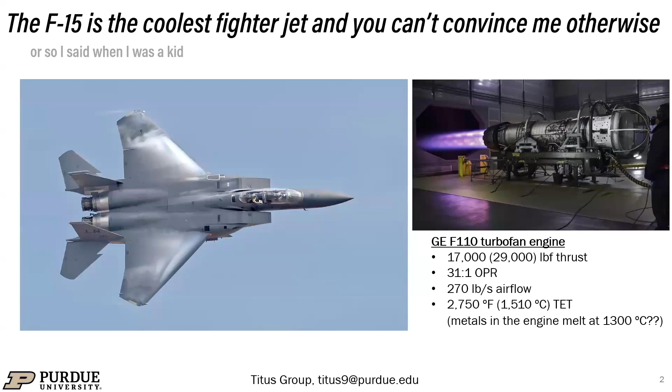And the crazy thing to me is that the hot combustion gas operates at 1,500 degrees Celsius, but the metals that extract the energy from that melt at 1,300 C. How does that even work? So we'll talk about that here in a minute. So things like that started to get me really interested in metals and fighter jets and aviation, etc.

And during my time there earning my BS, I took two internships at GE Aviation, now GE Aerospace, thanks in part to my family friend Walt Buttrell, who got my resume to the right person. Always use your personal connections whenever you can, because finding a space for an engineering physics major at GE Aviation is pretty tough. So that was kind of the through line there.

So being at GE Aviation got me really interested in the high temperature metals that are used in these gas turbine engines. And so I wanted to pursue my PhD in materials. And my advisor was Tresa Pollock then. So I went into my PhD actually, even before that, thinking I would just go work for GE, be 25 with a house and family, and the stock market crashed, so that didn't happen.

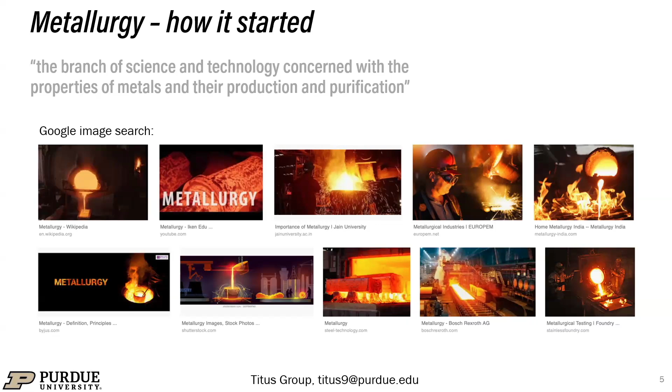So I work on metals, and one thing I really like to get across to students is that if you do a Google image search, this is what you see, kind of really red hot metals pouring and kind of dirty, the soot on that guy's face. And if you're interested in metals, this is a career that you can pursue, and many of our students do pursue this. But nowadays, it looks very different.

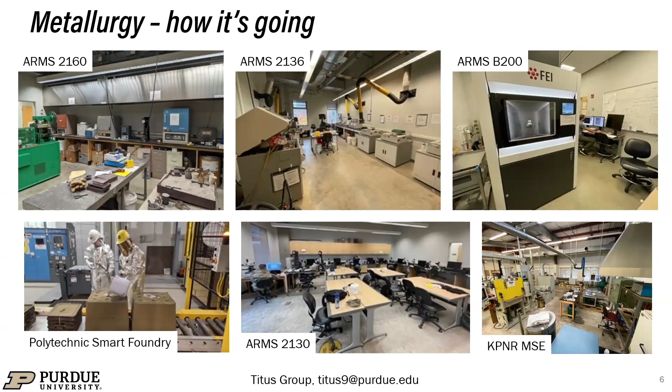So here's some of the laboratories that we're working in. I point out in the top right, this is a transmission electron microscope where we thin down metals to 100 nanometers, sometimes even 20 nanometers, right? And so it's only a few atoms thick, essentially. And then we just stick it in this microscope and crank up the magnification to see atoms, and I'll show you some of that later. So it's very different metallurgy now than perhaps what you may have considered in the past.

And metals are everywhere, right? So I remember when the Ford F-150 changed from a steel chassis to aluminum, GM came out with a commercial making fun of them for their weak aluminum alloy. And then 2 years later, GM started moving all their trucks to aluminum as well. So that saved a ton of weight for Ford and now GM.

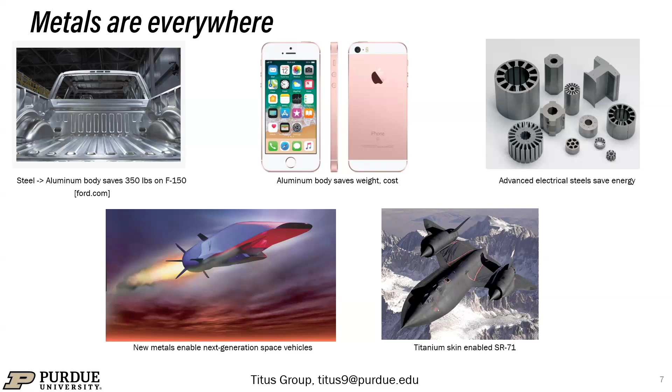Aluminum at the time was used on the iPhone 5S, I believe, and now Apple spent a bunch of time trying to figure out how to make it out of titanium, which is a really interesting metal story in its own regard. Advanced electrical steels, and then, of course, at Purdue, we're interested in hypersonic vehicles, and metals are used there. And the titanium skin enabled the SR-71, the Blackbird, which is my second favorite plane.

And so to kind of summarize this plane, what's really interesting is that the skin on this plane got so hot during flight operations, they needed a new alloy to cover it with. So they co-designed a titanium alloy during the development of this plane.

And honestly, a lot of that co-design for a given application has kind of been lost because we've come up with this whole catalog of materials that designers can go pick and choose. And then they say, okay, that one will work, and I'll design around the deficiencies in the material properties. But nowadays, I think we can come back to this concept of making new materials specifically for an application and making that co-design process very successful as it was for the SR-71.

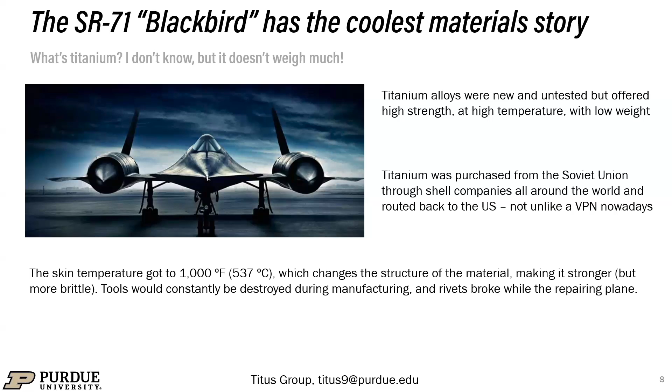Well, very successful. They did have problems. It heated up so much that the titanium alloy aged and embrittled. And so when they were doing repair operations, they would often break off many of these rivets, and a lot of the tooling would just get completely destroyed. So they didn't know everything about titanium at that point, but it flew. So good enough, I guess.

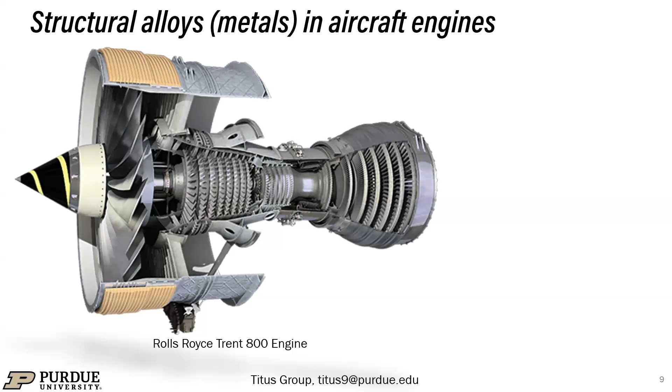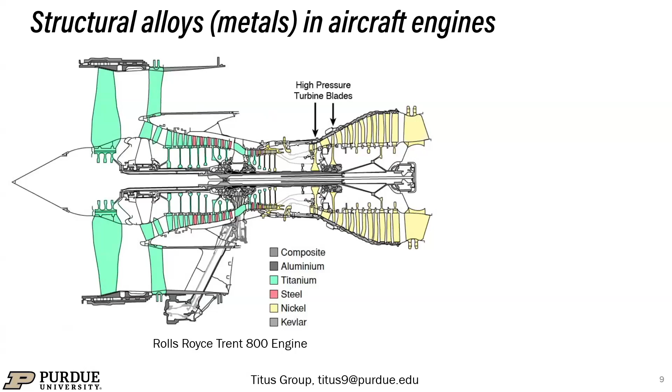So my research works a lot on high temperature metals used in gas turbine engines. In particular, these are the engine components near the aft, the highest pressure, highest temperature capability structural materials out there. At least they have the nice balance of properties. This is a high pressure turbine blade. It's coated with a ceramic coating and has complex internal cooling passages. It's frankly a marvel that we can even make these things and that they can survive 1500 degrees C when they melt at 1300 degrees C.

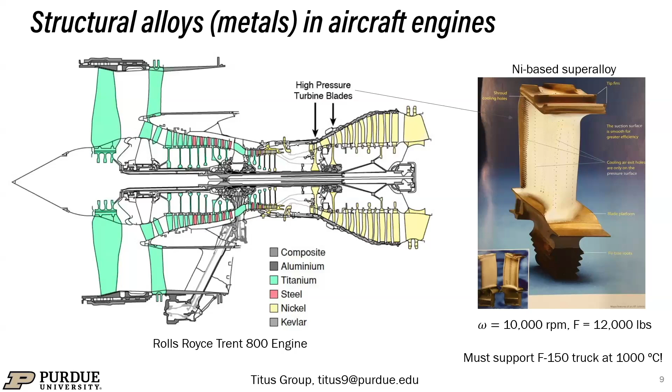These individual blades that are about this big have to support on a 3 millimeter cross section the weight of an F-150 at 1000 degrees C. So it is truly remarkable what these metals are able to achieve. I'll skip this real quick. Again, just to say things get really hot in these turbine engines.

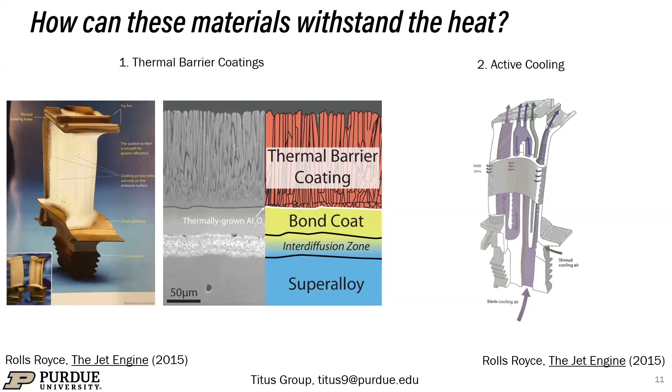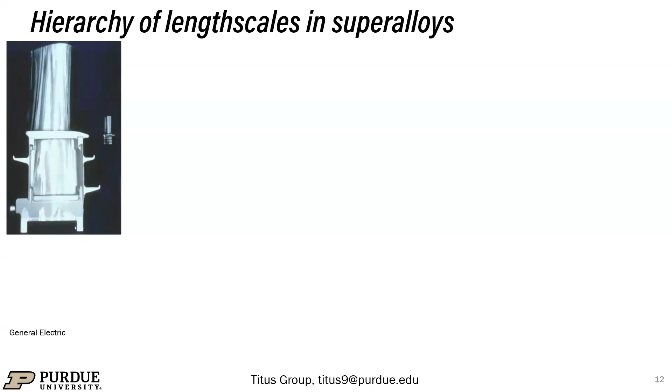But what makes these materials withstand the heat are these thermal barrier coatings, ceramic coatings about the width of a human hair. So that's that top thermal barrier coating you see there. And these active cooling passageways. And these are cast components that are very difficult to create during these casting processes. These superalloys are also very complex. You can look from very large land-based gas turbine engine blades that are about 3 feet long to aero-based ones that are a few inches long.

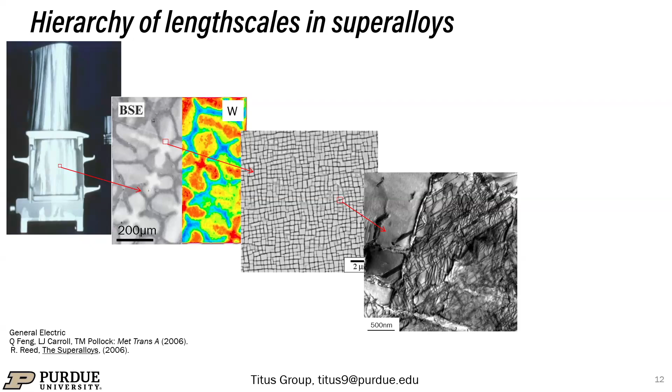Looking closer, you get this dendritic structure with some inhomogeneities there. This, at an even finer length scale, actually provides that high temperature strength. It's kind of this brick and mortar-like structure. In my group, I'm really interested in looking at even smaller length scales. These little black lines are not actually in the material per se, but due to the diffraction conditions used in these transmission electron microscopes. These are called dislocations. They were theorized many decades before they were actually observed, as I'm showing in this image from my PhD thesis.

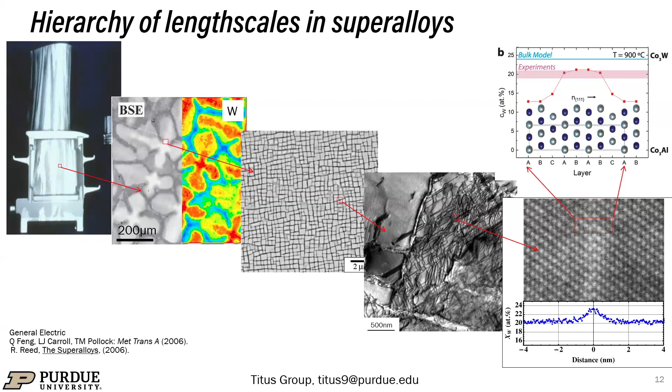And we look all the way down to the atomic structure. Each one of these dots here is a single column of atoms. And you can see in the middle there's an interruption in that stacking sequence. We're interested in modeling the change in chemistry there through atomistic simulations, but also verifying them through experiments. And we relate these all the way to the left, the macroscopic behavior of these metals. A lot of this work from my thesis, looking at these atoms, formed the basis for my NSF CAREER award that I won when I got to Purdue.

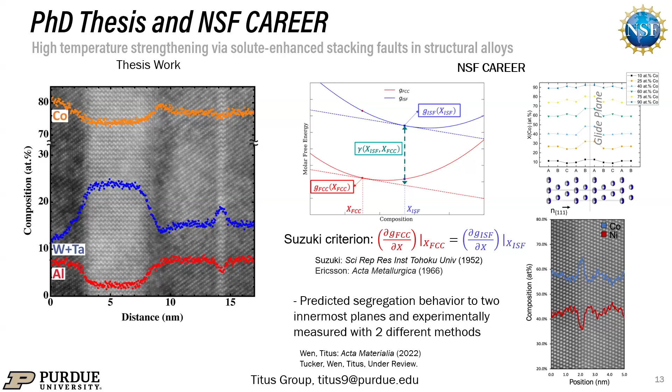I really have to shout out Dongsheng Wen, who's now a postdoc in the UK, and he really worked on the theory of this. One thing I want to get across to the graduate students here is that we're citing work from 1952 and '66. This phenomenon was theorized well before anyone could actually characterize it, and well before we had the models to predict the composition variations. So we basically take new toys and apply them to these very old theories. When you're in the library, don't be afraid to look up really old papers, because there were just as smart people then as there are now. So definitely utilize those.

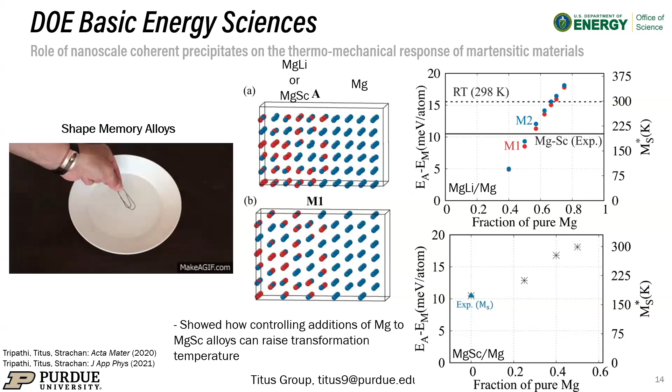We've also looked at shape memory alloys. On the left, it's a pretty unique material where you can bend it, deform it, put it in some hot water, and it will go back to its original shape. This was with my colleague, Professor Strachan. Here we're looking at novel materials that are magnesium scandium or magnesium lithium based, and we're trying to make them better for higher temperature applications. This was a nice example of that. More recently, we've been looking at discovering and designing materials for high temperature applications.

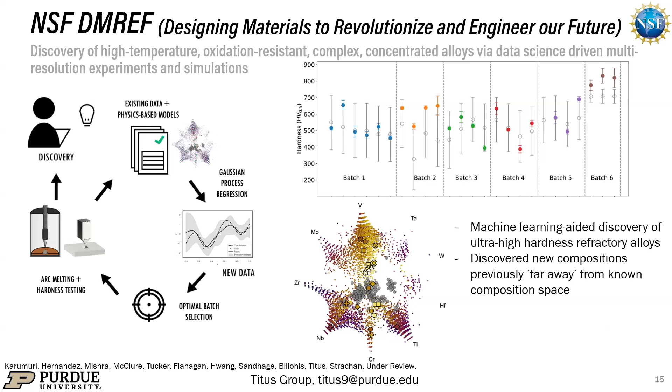This is again with Professor Strachan, Ali Strachan, Ilias Bilionis, and Emmy, and Ken Sandhage, who's here as well, where we're trying to discover very strong and oxidation resistant materials here using a combination of machine learning and autonomous discovery of new materials. And then I also had a nice collaboration with AFRL for a couple years where we were looking at oxidation properties, and my group was doing the modeling for this work. Nice pretty colors here of these various oxide layers that are forming, and we tried to model this that we've then applied to other systems as well.

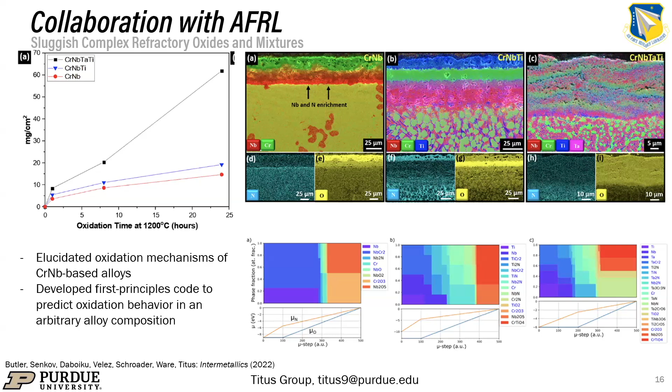And then finally, just a little vignette here again. This is with Haynes International, the company that Dave mentioned that has produced material that is on Mars right now, or that got the rovers to Mars. So here we use a combination of atomistic simulations with phase field dislocation dynamics with Professor Marisol Koslowski to determine how these materials deform under extreme conditions. And so this was a very nice example of this.

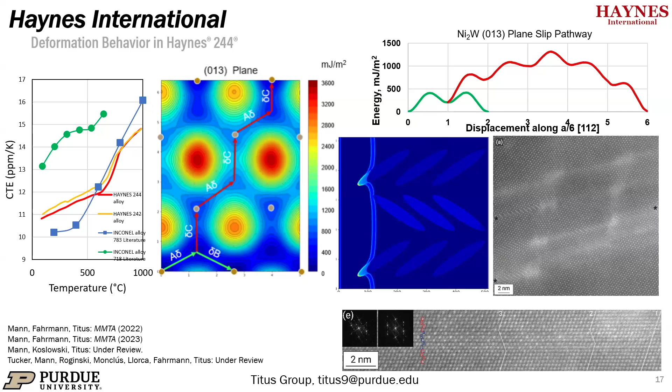On the far right, I'd say my current PhD student, Victoria Tucker, was able to get this image. It may be, in my mind, the most beautiful high-resolution TEM image that I've seen, eclipsing what I got for my thesis. So I'm envious of her work on that, and she's worked very hard to achieve that. Oh, and during this work, we went to the beamline and we took a little trike ride around the multi-mile synchrotron ring up in Argonne in Chicago.

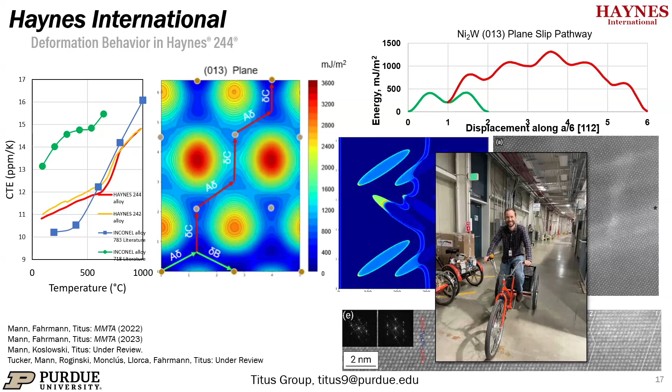So more recently, though, we've been taking these fundamental studies and applying them to our various industry consortia that we've spun up in materials engineering in the past years. So one in surface engineering and enhancement, heat treating, which I've been leading with Mark Runninger, and then our new Center for Metal Casting. And it's really interesting to take the fundamental part of our work and apply them to what's important in industry to actually make stuff and make it relevant for things that you all use on a daily basis. And this has really enriched and kind of refocused some of my research to be more useful and a little bit less fundamental, but we still pursue these two tracks in parallel.

And so here's some of the industry members that we have in these. And this has been a really great opportunity to work with folks from around the Midwest, as well as some old colleagues from General Electric, actually from when I worked there about 15 years ago as well. And so I have to, of course, give thanks to my current group who's working on a variety of projects, many of whom are co-advised by others here like Ken Sandhage, Tim Pourpoint. I'm not sure if I'm missing anyone else right now. And so we have a lot of exciting projects going on currently.

And of course, I need to acknowledge many of my faculty mentors, mentees, and staff, Purdue friends and family. I can't go through all of them, but to point out a few, my PhD advisor, Tresa Pollock, and Dave Bahr, both of whom have been very close mentors and helping me throughout my career in various stages. Xinghang Zhang and Alejandro Strachan as well, the formal mentors, many of my co-PIs, et cetera. And the staff as well has been amazing to keep me up to date on business things, and as Chris said, make sure you're where you need to be at various points.

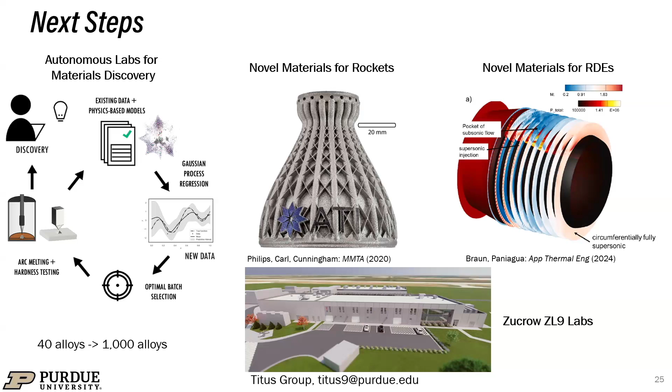And I just got a tour of the Zucrow labs, which is very nice. Unfortunately, I wish this image showed the business end of the building where it's all being tested, right? So I want to help make some of these new materials, test them, and hopefully fly them. And I think literally only at Purdue do we have the opportunity to do this across the country. And so that's one reason why I'm here today and accepted that position many years ago. So with that, thank you very much for your time and attention, and I can take any questions.